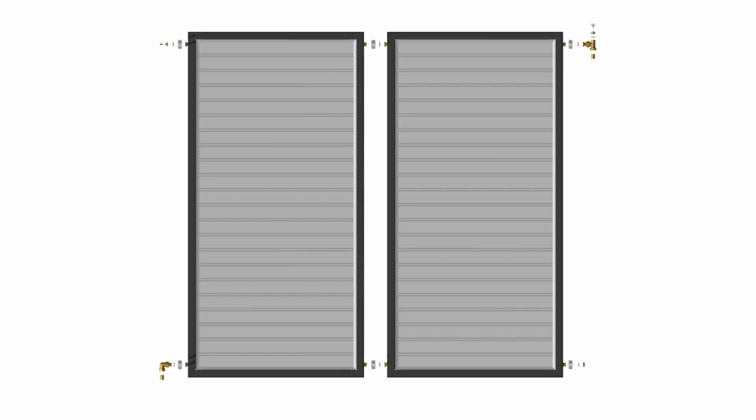Today we're going to show you how to connect the Lochinvar installation kit on the LSP20 Plus commercial solar water heating panel. The installation kit must be connected after the extension kit. If you have any questions, please click on the links below.

I'm now going to show you the components you receive in the installation kit. From the previous video, you see that the installation kit components are fitted at either end of the bank of panels you've just installed. The extension kits join the panels together, and once that's completed, you connect your flow and return pipework to either end of the bank of panels—this is the kit you need to do that. Within the kit you get a series of clamps, used to connect the components to the various parts of the collectors.

On the return side of the bank of collectors, where the return pipework comes back to the bank of panels, you get the return connection. On the flow from the bank of collectors, you get the flow connection.

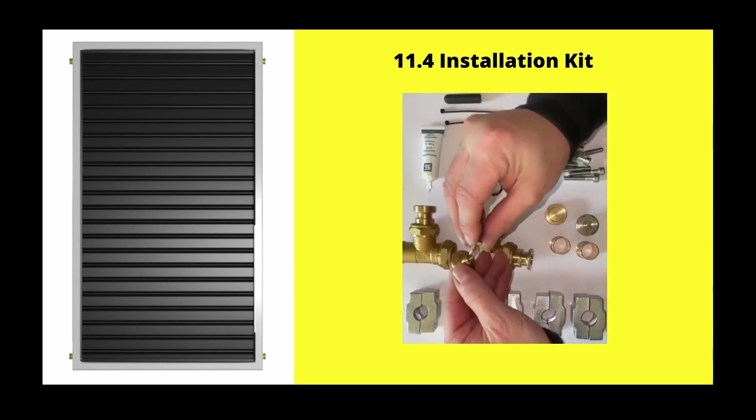There's two sections of the panels that get blanked off. The bottom right hand side of the bank gets blanked off with this blanking piece, and on the top left hand side of the bank of panels you get another blank, but it does have a small air bleed on it as well because it's at a high point. You can undo that and release a little bit of air if need be to assist with filling.

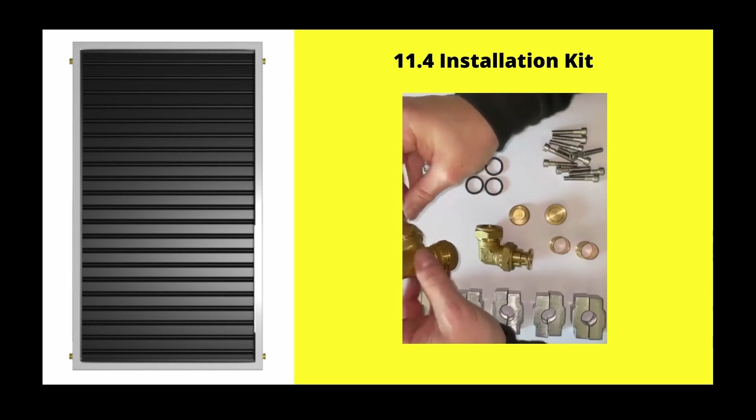You also get a bleed screw that goes on top of the flow section of the connectors, onto the bank of collectors. That's your flow pipework, and then you have this bleed point, and you get a little radiator-style bleed key with that as well.

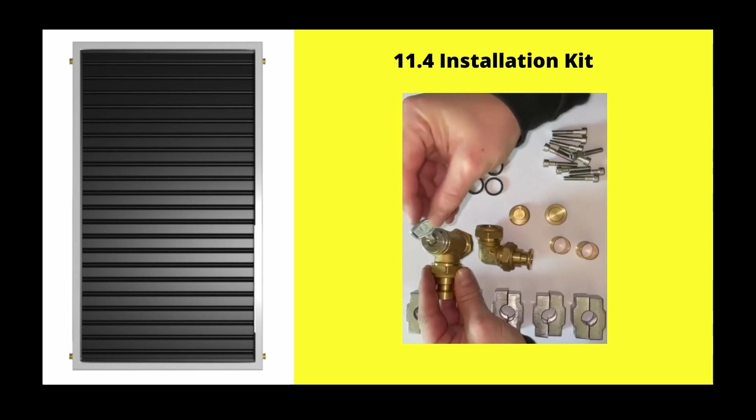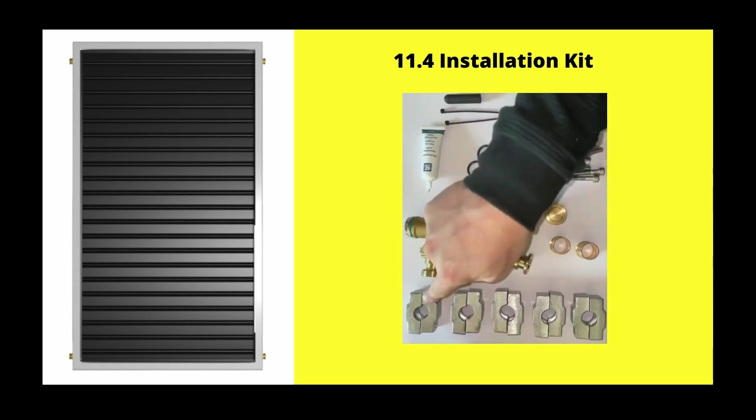You of course get a series of O-rings as well, clamps similar to the extension kit, and a tube of heat paste. It's advisable to put some of this on the threads of the fixing screws just before you screw them into the clamps.

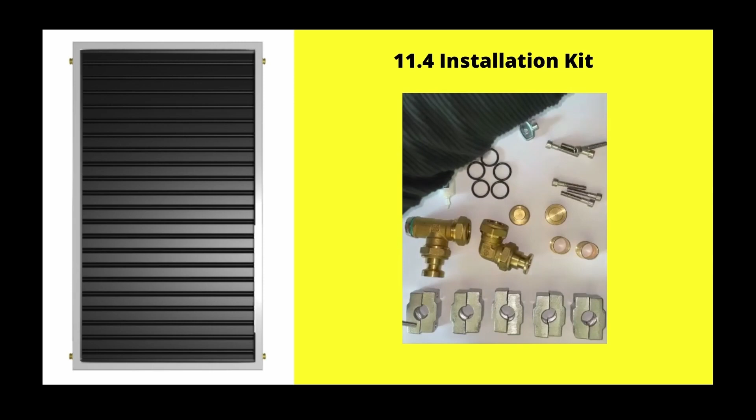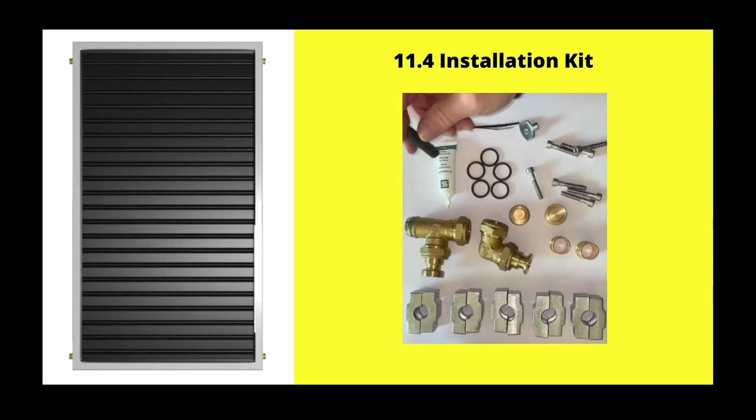You also get a couple of cable ties just to secure the sensor cable that goes into the collectors—I'll show you that connection again on the panels. You also get this piece that sits over the entrance where the sensor goes into the side of the panel, and it secures it in place and stops it dropping back out. So that's the components you get in the kit.

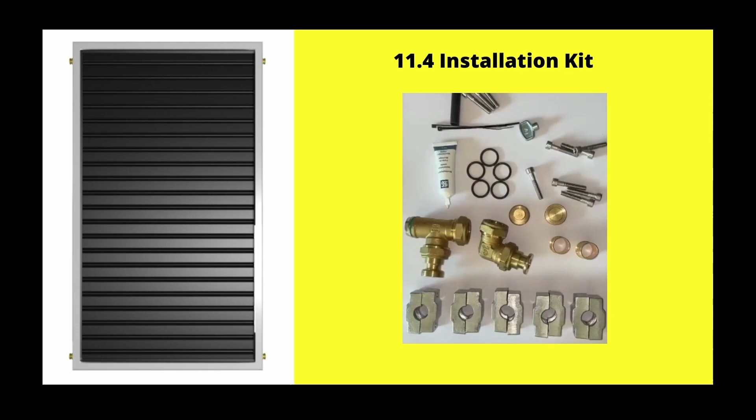Now we're going to watch them being fitted to the bank of panels. So we're going to now look at the installation kit. It's used to connect the flow and return pipework to the panels once you've joined them together using the extension kit. We looked earlier at the components you get in the kit.

A good tip is, as you can see, I've laid out the components into the area that we're going to be fitting them, rather than looking and trying to find all the individual bits out of the box. It's good to lay them out like this.

So if you come round and look at the panels, you'll see if the far end's the top of the array, then typically what we'll do is return at the bottom left of the bank of panels, and your hot flow comes from the top right hand side of the bank. So return in at the bottom left, flow out on the top right. The other two connections on the other sides get blanked off.

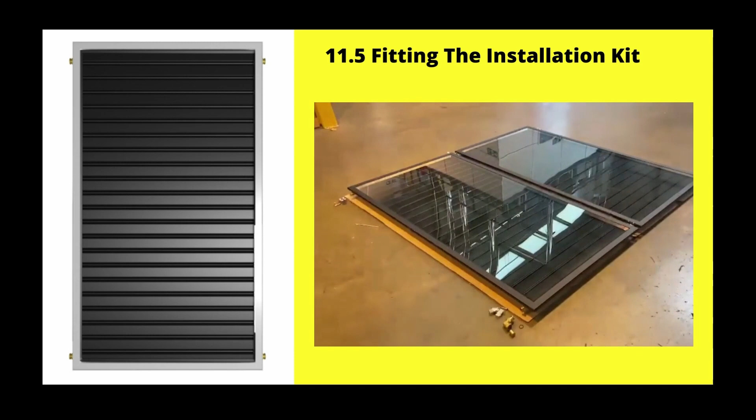The blank at the top left also has a little air vent, because it's the top of the bank of panels and you could get air forming at that top bit, so we need to release that when we're filling the system. So we'll start first with the return connection down at the bottom left hand side.

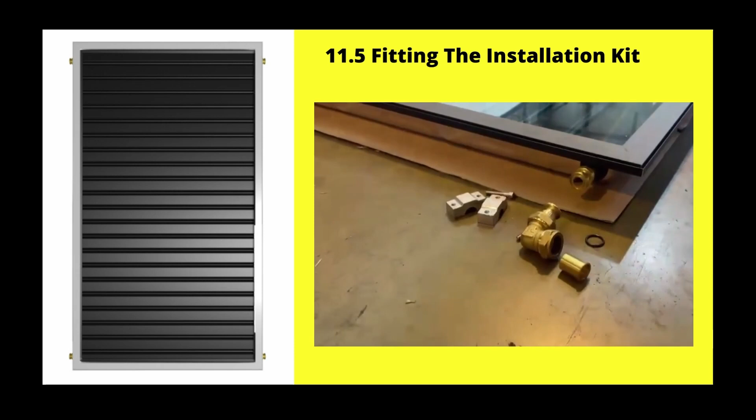If we go down to there, you'll see it's the same principle as before with joining the panels together. We have an O-ring. The bit that we're going to be connecting onto has the recessed part, and then the fitting itself has the flat face.

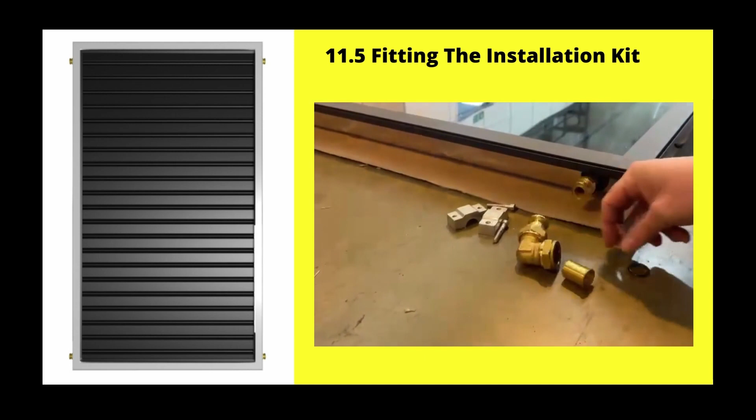So you would put the O-ring in, and then we're going to hold that up against there and use the clamp to secure it in position. You also get a support sleeve, and that's because we need to really tighten that compression fitting well. These are 22 mil pipe work, so you put your sleeve in, and then the 22 mil pipe work just slides over the top of that sleeve, and it gives the copper pipe some more support as you're tightening that compression fitting.

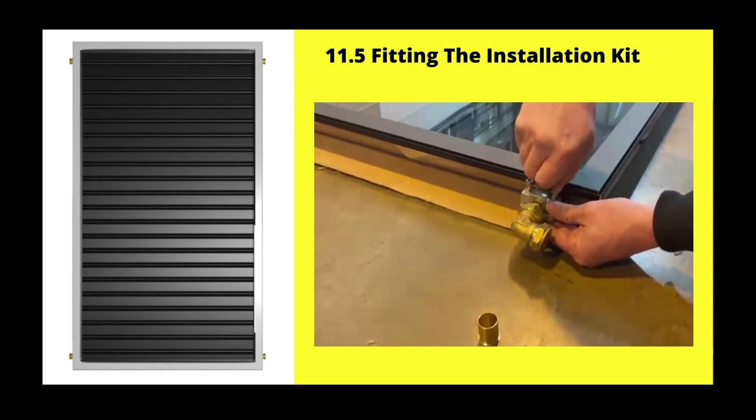So I'm just going to leave that there, but you would put that into your pipe, the end of your pipe work, and push that in like that. As before, you will hold this up to there, then you put your clamps on. Do the screws finger tight first of all. Once you've done that, you would of course then tighten that clamp up with your Allen key, and that's your return from the system back from the pump station to the collectors.

I'll show you how the liquid flows through the collectors once we've installed the whole of the installation kit. So we'll go up to the top section now.

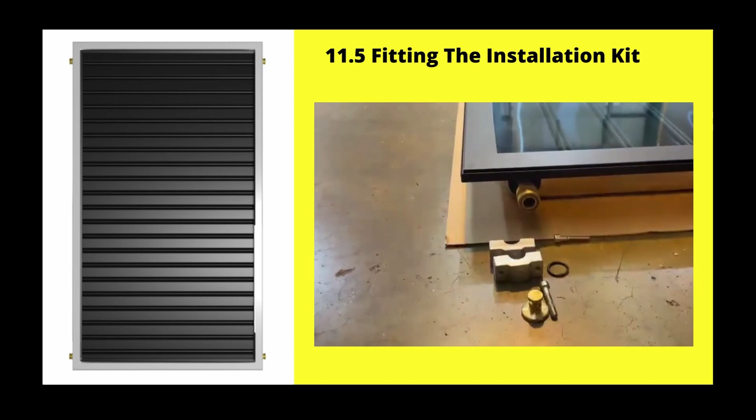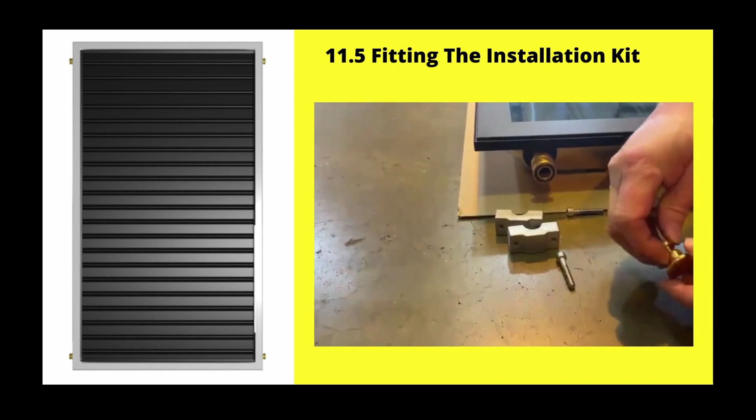So this section gets blanked off. You do get a set of instructions with the kit as well, and it shows a nice picture of where all these components go. So now, O-ring in. Got a blank here, which you hold up against there. And as you can see, it's got a little thumb tight air bleed, so you can just undo that, and when you fill in the system, it just aids getting rid of some of the air out the top of the circuit. Then when you're finished, you just tighten it back up again.

So you put your clamps on. Just to speed things up, I won't fully screw them all the way down, just enough to hold on to it. Again, of course, you would tighten these fully up with your Allen key. Now that's a blank end, and we'll describe how the fluid flows through the panels in a minute.

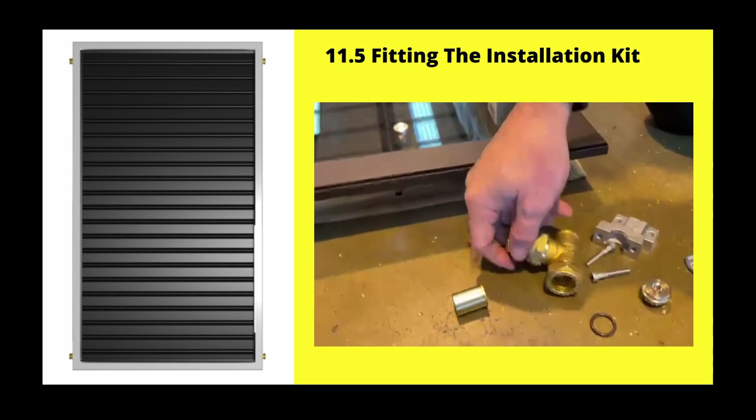So if we go over to the flow side at the far end, this is going to be your flow pipe work, and there's a connection at the top there, and in there goes a little air vent, a bit like an air bleed on a radiator, and you get included in the kit a little radiator key as well, a bleed key. And of course that's the main point that we're going to use to remove the air from the circuit when it's being filled.

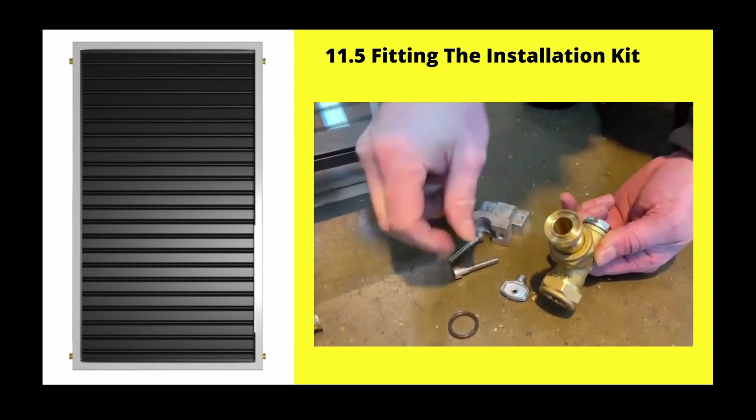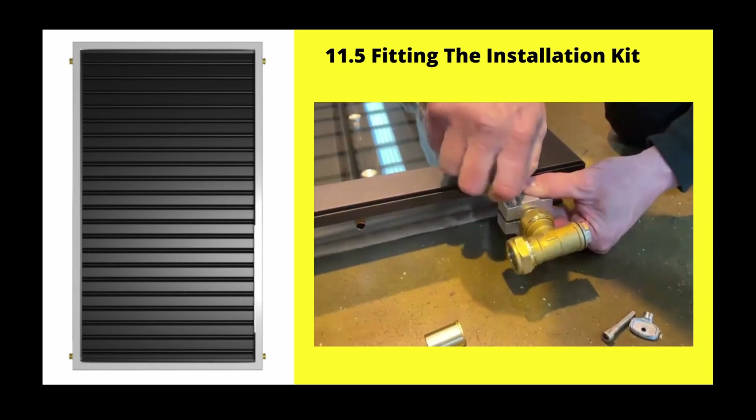It's the fitting itself that has the recessed part, this bit, so you put the O-ring in there, hold it up against the flat face. This of course is flat because if you were joining another panel, this bit needs to be flat because the other panel would have the recessed bit, so this bit has to have it now. So you hold that up against there, put your clamp on, and also remember to put your heat paste onto the thread of the fitting like before.